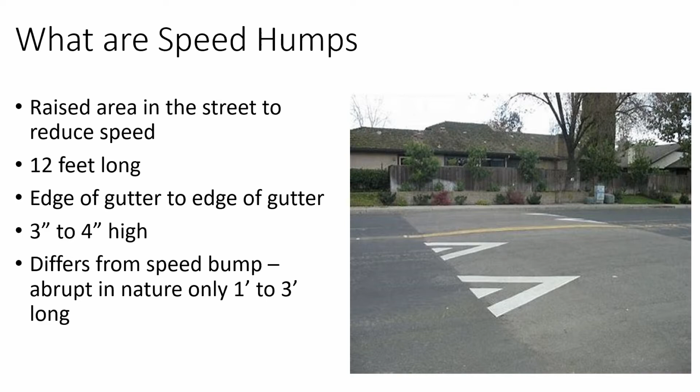Okay, what are speed humps? Basically it's a raised area in the street to reduce speed. They're typically 12 foot long, about 3 to 4 inches high, so they're not very highly raised. A speed bump, on the other hand, is found in parking lots. Those are very short, 1 to 3 foot wide, and 4 to sometimes 6 inches high. Those are private; you don't want to put a speed bump in a road because that's considered a hazard.

Where are speed humps recommended? Only in residential areas, placed on streets with a quarter-mile continuous length, a regulatory speed of 30 miles an hour or less, which all of our residential streets are. You don't want to put them where a driveway is located, close to an intersection, or near fire hydrants. You use your judgment of where you want to put them, but typically it's between driveways in a residential area.

Some things to consider, typical of speed hump policies across the country, the state, and even outside the United States, is a petition from 2/3 of the residents or households whose property abuts the street segment. In other words, one person wants it, goes up and down the street, and tries to get 2/3 of the people to sign a petition. If they agree, we look at next steps, such as whether it's city initiated versus citizen initiated. Another consideration is whether to require a minimum 85th percentile speed study, where speeds have to be over 35 miles an hour. Some cities have a speed limitation, some don't. That's something to consider.

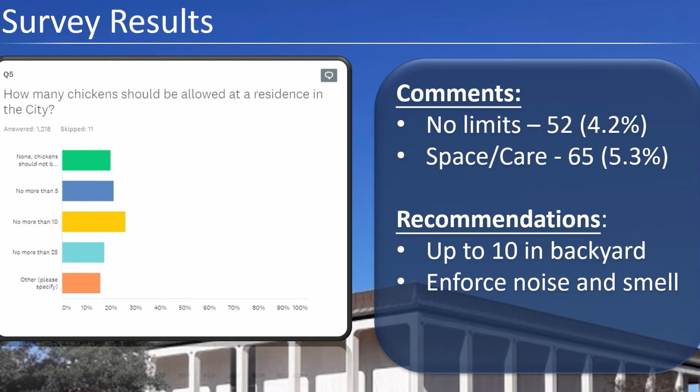Don't we have a limit right now? Not in the total number of chickens. No, I don't believe we do. I think we only have a cap on the number of chickens in an agricultural program, not if you're just raising them for the joy of chickens.

Let me ask a question about 'not visible from the street.' Yes, ma'am. Because I'm having a little bit of trouble worrying about putting chickens in the backyard. If you're on a corner lot, and you build a privacy fence that doesn't interfere with traffic sight and all that, then what difference does it make if they're on the side yard or the backyard?

That's a good point. As long as they're not visible, then your neighbors would probably be happier if they were on the side. I'm just having some problem with requiring backyards. That's a really good point, as well.

I want to circle back to a point you made earlier that I don't know everyone picked up on. In certain parts of our community, it's not normal to have a screened fence backyard, so if you say 'backyard,' you're not necessarily keeping the chickens out of sight from the street. So what I'm hearing is you'd prefer it say 'behind an enclosed screening fence' or similar language, without concern whether it's in the front yard, backyard, or side yard. That's a good point. I'm seeing nods around the table. I'll work on some language to bring back to you.

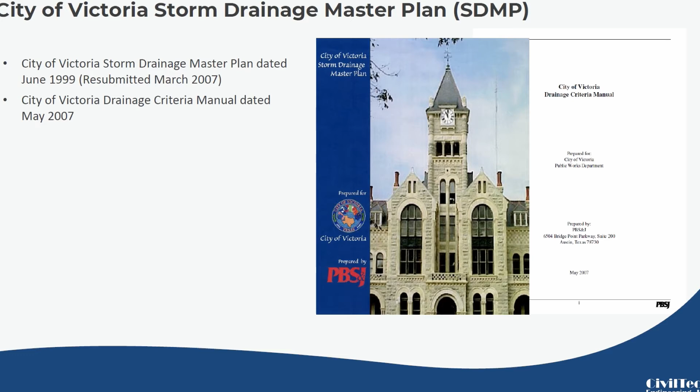But the actual whole engineering product and the cost associated with that plan is in 1999. So the document is on file. It's referred to by the Department of Public Works as what they implement projects.

So what are the elements of the plan? If you allow me, I'm going to go through this list here. First, in that dark blue highlighted area at the top, it was really to develop recommendations for what we call the ultimate development of the city. That's a complete full build out. So there was a series of projects identified to accommodate all that additional water from new development. It wasn't necessarily developed to solve existing problems, okay? But by implementing some of the projects, it would help to alleviate current problems. Within that plan, there are several elements.

As this comes back up, 2 items in it were called regional detention ponds. One along Lone Tree Creek, which is called the Lone Tree Facility, and that has been partially constructed. It's about 75% complete today. Much of that excavation of that basin has taken place through the Highway Department's excavation. And then there was another facility proposed along Spring Creek.

Northwest of Loop 463, also when you look into the plan, you're going to see several what we call open channel modifications, improvements along your major streams. The plan calls for widening, deepening in some cases, and several bridge and culvert replacements along creeks such as Whispering Creek, the North Outfall, US 77 Outfall, the West Outfall, Ben Jordan Outfall, South Outfall, Jim Branch Outfall.

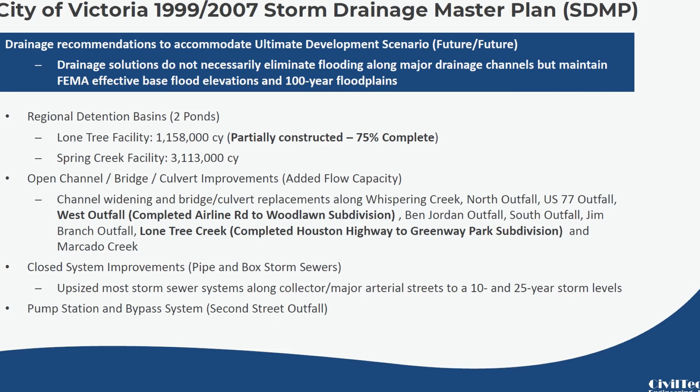Updating those costs today, which we did, there's still a cost of about $293 million to implement your storm drainage master plan.

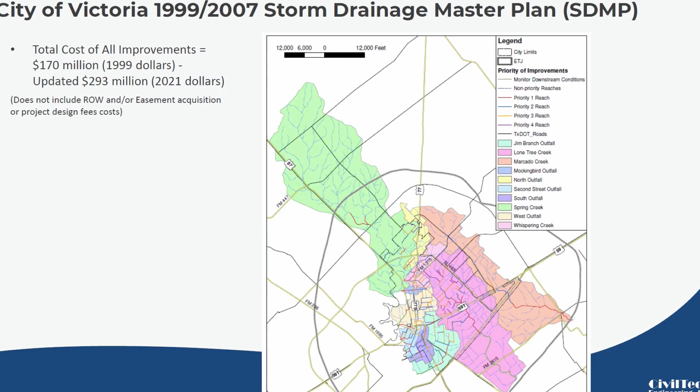There's a little note there that does not include right-of-way and easement acquisition cost. So that is your current storm drainage master plan.

What you're hearing too today is something called FEMA floodplain maps, and there has been a relook at the floodplains in the city of Victoria. I want to point out something about the current floodplain maps with you.

So the current regulatory maps that the city regulates off go back to 1987, 1998, and 1999. FEMA has been in the process of updating those maps and have reissued them as pending approval as of April 30th, 2020.

One thing you should know is the data, the scientific data within that update is still based upon the science that was developed in the 1990s. The only thing FEMA is doing, and this applies to several communities, is updating the topography for the area and remapping the same water levels, but on better topographic area information.

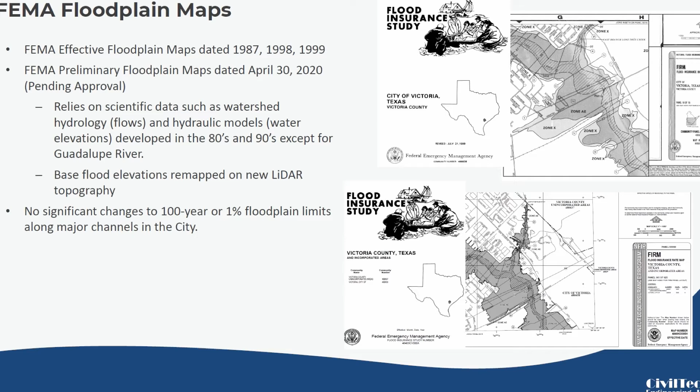It's called LIDAR today. So it does help communities at least have some better understanding, but still the science really goes back to the 90s in terms of hydrology and hydraulics. So when you look at the information, there's really not a whole lot of differences between your 100-year floodplains along your major channels.

So what I'd like to do is to take you through each of the tasks that we did for your project and give you a little bit of background on each of those tasks. But at this point, is there any questions before I get to each task element?

Yes, ma'am, I've got a question, and perhaps it's because I don't have the understanding that you do. But on this page before where it says no significant change to the 100-year or 1% floodplain limits along major channels, I take that as a good thing, and that the current drainage plan that we have in terms of development is working. Is that correct?

That I think it's, I remember no net gain from a long time ago. I think that's still in there, and I'm taking that to mean that we're on the right path. Yes, we need to build more capacity so that we can continue that no net gain, but am I making sense, or am I like, and if I'm way out, you can tell me so.

Well, definitely the city has made investments in drainage clearly over the years. Every time you build a roadway, you're making investments in drainage. There's been some implementation of your regional plan to accommodate new development, but very limited amount of that work has actually been done today. There does not appear to be significant floodplain water in people's homes in Victoria.

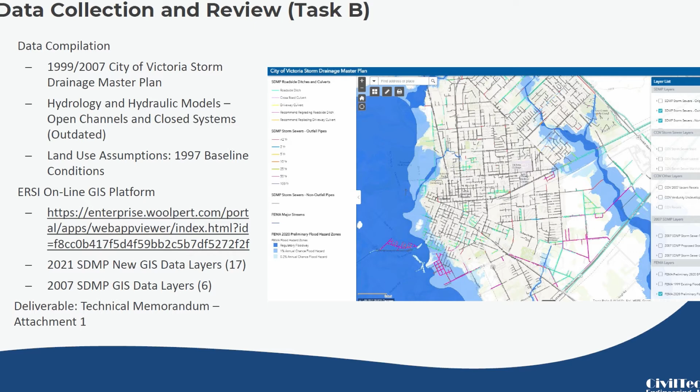In the PDF presentation, which Council probably has received a copy of, you can hit the hyperlink and go to the online GIS platform currently run under our website, CivilTech Engineering. That will eventually be transferred over to the city's GIS, and they'll have the ability to run those layers. If we had time, we could look at those as well. But we created 17 new GIS data layers, which add to some that go back to 2007 that are on there.

The first priority the city asked us to look at was undeveloped parcels and the potential for development of those parcels. There were a little over 245 undeveloped parcels in the city, representing about 4,000 acres. We were able to look at 45 of those, representing about 1,350 acres of undeveloped land in the city.

Shown on the right side is the location of all the parcels that we looked at, ranging from 2 acres up to several hundred acres.

As part of the engineering effort, the city asked us to look at what development constraints in terms of drainage would be on those parcels. So we developed 28 development constraint maps to aid the city's Public Works in understanding what the drainage issues would be, as well as developers, when they look at these developments, to better incorporate drainage in the future.

With those, we were also able to develop 5 regional drainage solutions where city participation would be needed to help development progress on these tracts. Those solutions included channel improvements, storm sewer improvements, and areas where easements are needed.

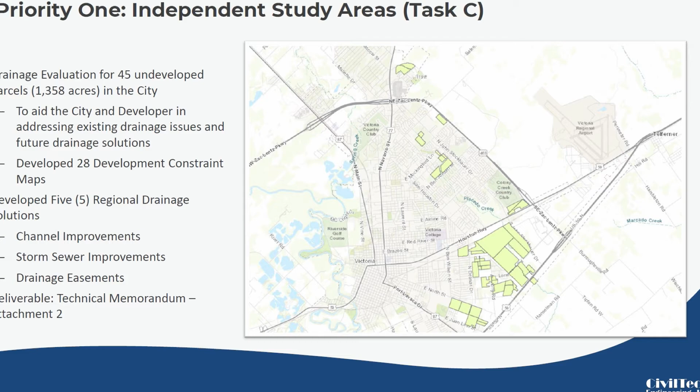Thank you, Melvin. Can y'all read that up there? I can't see anything, I'm going to have to use my notes.

As Melvin explained, we selected 45 undeveloped infill parcels within the city and performed a pre-development drainage analysis on each.

The green figures are the parcels that we looked at. We utilized all of the city's existing GIS data, combined with all of the new data generated by this study, to evaluate the development potential of each of these sites.

What we found was that 17 of the studied parcels had no access to an adequate drainage outfall necessary for proper development. We also found that 12 of the parcels had moderate to severe floodplain issues.

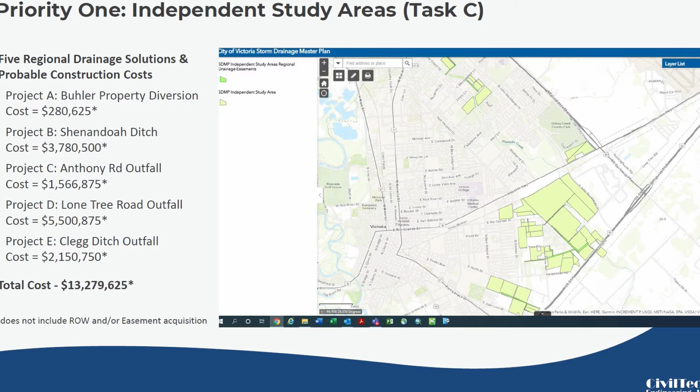We then searched for drainage solutions for each of the difficult tracts and came up with 5 regional projects that would improve the development potential of 23 of the infill parcels studied. These 5 projects would also improve drainage for other undeveloped and some developed tracts within the 5 general regions. I'm going to briefly go through each of the proposed 5 projects.

The first of the projects is just outside of Loop 463, between Salem Road and Mockingbird, on the Buhler property. It's a very old problem.

This problem was created in the 1980s when Loop 463 was first constructed. The master drainage plan at the time, the 1978 plan, had designated that this property, about 100 acres, would drain under Loop 463 into Lone Tree Creek. But when the loop was constructed, the highway department took advantage of an existing rice canal and drained this 100 acres under the loop at this location.

The problem is that Meadow Creek subdivision had been constructed 10 years prior, and since that time the water runs through the loop here and then through Meadow Creek subdivision. It ends up in Lone Tree Creek right about here at East High School, so it gets to the same place, but the system through this subdivision was not designed to take this acreage through it. So as this area develops, it's going to get nothing but worse.

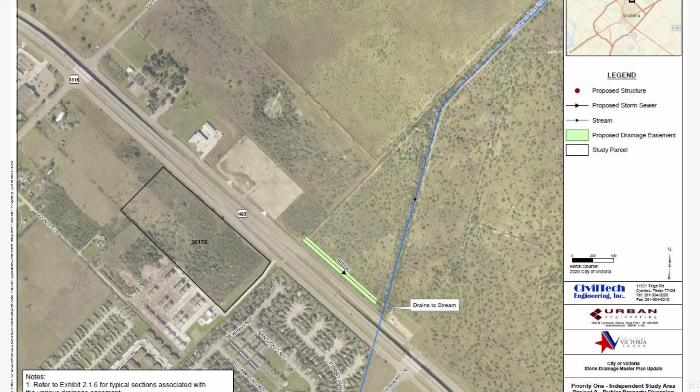Under normal circumstances, Shenandoah Ditch functions pretty adequately. I personally have never seen it cause a problem. However, this ditch is responsible for draining quite a bit of area from Guy Grant Road up to around Will Hurd. This is John Stockbauer—it drains this area too. It's got a fairly large area to handle, with quite a bit of undeveloped property. That property is undeveloped because they don't have an outfall—no ditch running up in there deep enough for them to use.

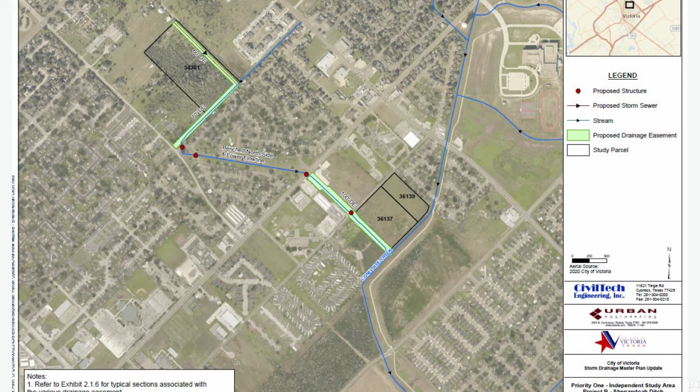But the overland flow analysis we did as part of this study, which Melvin will get to in a moment, indicates there's a larger lurking problem: the 100 acres north of the loop, plus everything from Loop 463 to Guy Grant Road, would rather come down that old Rice Canal spillway and go through this area. Once I looked more closely at what had been done here, I saw that if the storm sewer in this subdivision doesn't take the water, and the storm sewer in John Stockbauer doesn't pick it up, the downhill tendency is for it to end up at Shenandoah Ditch. So this is the route and the proposal in our plan to aid in that event, plus provide better drainage for this area, at a cost of about $3.8 million.

If you know Victoria, you know there's already a 72-inch storm sewer pipe there, and yes, we are proposing a second one. This piece of property is the one suffering from not having an adequate outfall to Lone Tree Creek. The estimate for this project is $1.57 million.

And would it just fix the place you're pointing to? Are the other two lots okay the way they are? It's the whole block, if we can call it that—not just the bold tracts. Also, the James Wayne property on the left would benefit from it.

The current underground 72-inch storm sewer drains this portion of the subdivision, and all of this property up to about here. It's just not large enough. I might as well say it—this landowner did not allow an open ditch to be put in at the time. Putting in an open ditch would still be the best way.

Feel free to interject with the work you're doing on the neighborhood piece too. I'm currently backed up—I keep hitting the wrong one. So that one was, this is a 72-inch pipe.

I'm more interested in this one. This portion of the solution is—I have a contract to solve these people's flooding problem, so I've been working in this area for a while. I also had a previous contract to work on development of that piece of property, and had to tell him we don't have a way to get there without the assistance of the city.

That's kind of the common theme—these people can't help themselves. This one because it's an existing subdivision, the other because they don't have the power of condemnation or the ability to go to other pieces of property and get easements. They're drainage locked. We know the existing system is overloaded and we need to find solutions. So these two solutions of spreading this drainage out, taking it into the creek here, is the best way for this property by itself to gain access for drainage.

This solution is the best for this area. There's a hill right in here that you're not seeing—well, you can't see it, but there's a ridge in here. This portion of the property goes this way, this portion goes back this way. So there's a natural divide in there, and also it breaks it into bite-sized pieces. But yeah, I'm working on this, and that is a very possible solution for this drainage up here.

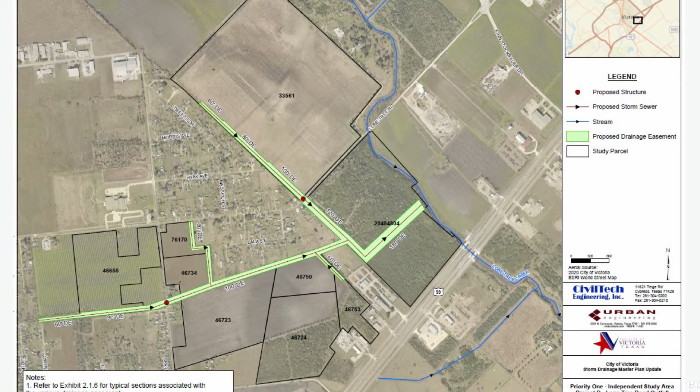This was mentioned in the '78 plan. It was a little bit different in their routing—they came straight through the middle—but this is basically what the '78 plan suggested. Was that helpful? Yes, okay. Yes.

We're coming up on 3 o'clock. We still have at least the parks plan coming up as well. Want to make sure we have adequate time to get through both, or let's just get through one. But I think we can get through this in the next 20 minutes? 30? Maybe 30 minutes, but maybe. I'll make it fast—last project. And then we can just take it from there.

Community center, old Stroman campus. There's no drainage coming out this way. These tracts, almost up here on the highway—these tracts were brought to my attention because they're for sale. And I said, they've got to drain this away. It's downhill, and downhill a lot. And we have no easements to get here. This person can't do it by themselves. And that's a common thread that we have on a lot of these projects.

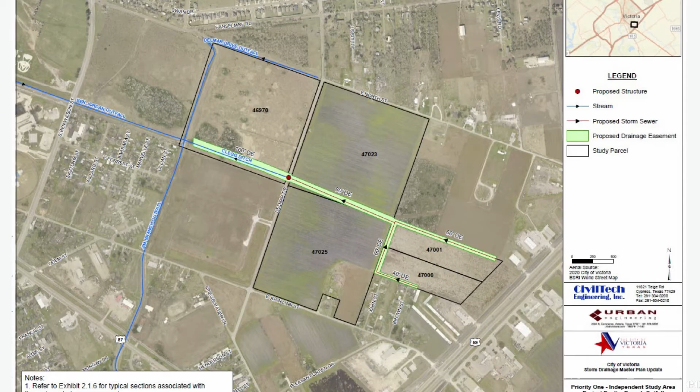Back to Melvin. All right, Melvin, you heard the man—got to run through it quick. Absolutely, thank you, Ray. You took all my time, but...

It's clearly very important. So as we progress through the study, this next part is really looking at the city's current drainage criteria manual and what updates would be necessary based on new information. What's happened different today is that the NOAA, the National Oceanic and Atmospheric Administration, part of the National Weather Service, adopted new rainfall data—the big drops of rainfall. The last rainfall data we had goes back to the 70s, which is what us engineers worked off.

In this table, on the left-hand side you'll see a storm event: 2-year, 5-year, 10-year, 25, 50, 100, and 500. On the right-hand side, you'll see what that current means—that's what your community currently uses. And then what's being proposed today is something called Atlas 14, the new NOAA information. Most communities across Texas have adopted this new rainfall for the design of storm sewers and open ditches.

When you look at this new data, what you're seeing is that if you look at what's highlighted here, NOAA, our government, says for the city of Victoria a 100-year storm is not 11.5 inches in 24 hours.

It's actually 13.4 inches in 24 hours, about a 1.9 inch difference. Other communities across the coast have also seen higher rainfall for their community. But what's interesting is that everything underground, your storm sewers, are designed really for this 5-year and 10-year event, and that's also very common. The rainfall really hasn't changed that much. There's very little difference in that rainfall.

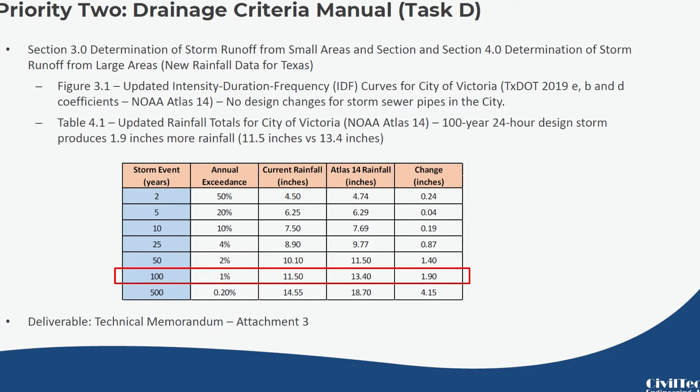But what we are asking, because of this 100-year rainfall being different, and the detention, is that the city should adopt a permanent detention requirement. Right now, all developers really do put detention in, but it's because your criteria says temporary. If you haven't built your channels yet, then you would only need to provide temporary detention. And the reality is that most communities are really going to require permanent detention.

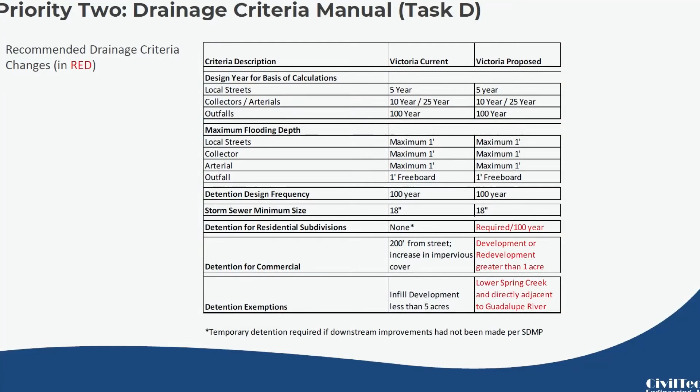So we have provided information for the city that says, remove the temporary detention, have permanent detention for the development community - clear guidance for the developer engineer. This really doesn't change what's going on today from all practicality, but there would be some exemptions that'd be looked at. Those exemptions are listed here.

Redevelopment, which are remodels or additions, would only require detention for any increase in impervious cover. Second, development that's 1 acre or less with less than 65% impervious cover would be exempt. Anything above 65% impervious would be detained for on 1 acre or less.

A lot of communities are going to green infrastructure. They're recognizing the importance of what we call low density development. So there would be an exemption for any parcel that has less than 20% impervious cover to be exempt. And then clearly any properties that drain to the Guadalupe River or to the lower reaches of Spring Creek would also be exempt from detention.

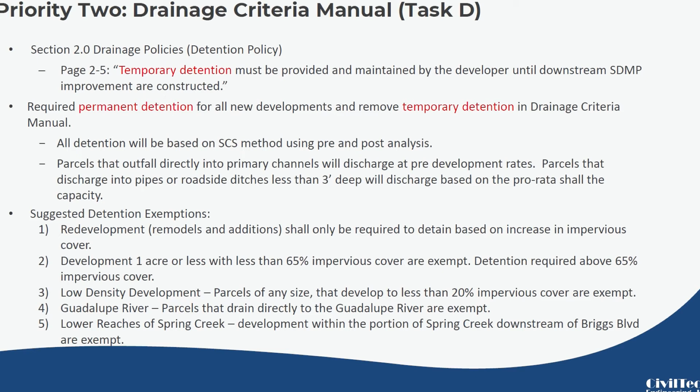We would also recommend - we ran several calculations - that to keep the playing field equal, the city Public Works needs a storage rate, what we call it, so the developers understand that this rate is the minimum amount of detention storage you would need based on the percent impervious cover. That way when information's coming into the city for review, they're able to check it against this particular curve to see the engineer or developer met the minimum requirements on detention.

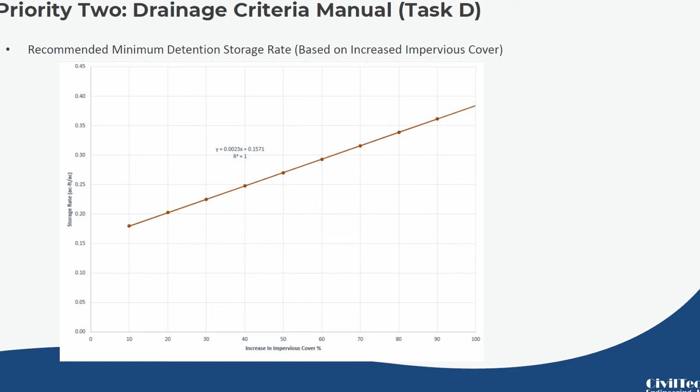I have a quick question on impervious cover and talking about low density. I'm picturing a solar panel farm field. Is that impervious cover or not? I'm just going to throw that out there - that may be something to think about, because I'm seeing water pouring off.

So you don't have to answer that now, it's just a thought. Specifically what you're referring to - typically that's ground cover, so concrete is impervious, gravel - there's a definition. There's definitely grass underneath, but then you've got wall-to-wall solar panels. Right, that's certainly something that has to probably be looked at.

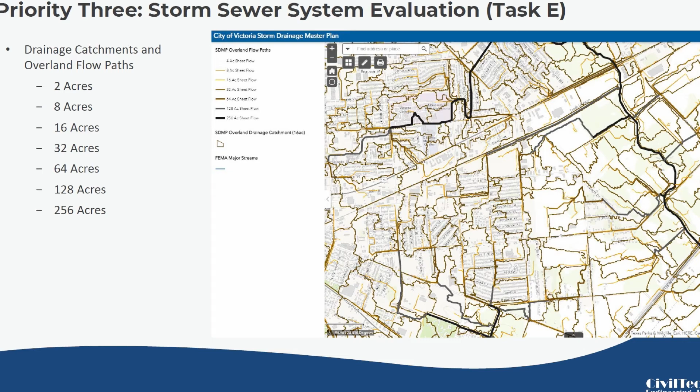Okay, so we'll go to our priority 3, which is a storm sewer evaluation. We did do quite a bit of technical work re-looking at the surface drainage across the city. There is a two-dimensional model that we ran to take the rainfall we talked about in the previous slide, drop it on the city, and determine how that would affect the flood risk. As Mr. Garza had pointed out to you, the FEMA maps give you a flood risk related to your major channels, your big floodplains, but the real flood threat exists throughout the city in terms of when your underground systems are surcharged - overloaded with the higher rainfall - then your surface must take that water and convey it to your outfall channels.

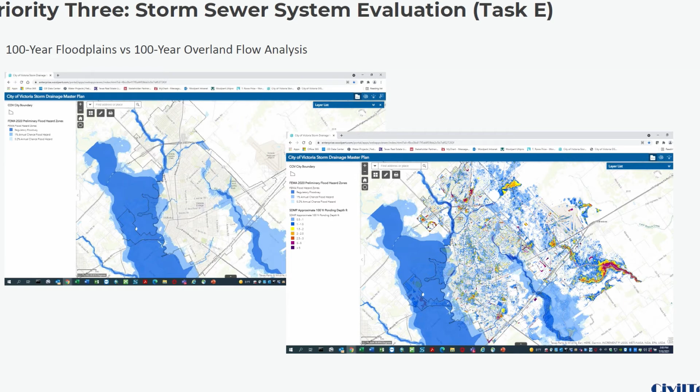The real flood risk is when you run a two-dimensional model with 13 inches of rainfall. You will see that the potential flood risk is much higher when you really look at a complete model analysis, which we have. This is very helpful for developers and engineers to look at how to better

drain subdivisions to key locations that may have had ponding problems. Priority 3 was really to take a look at your storm sewers and classify them. Many of the city storm sewers that were built years ago have a certain level of service that we looked at. Much of the city has less than a 2-year capacity for their storm sewers to drain water. The current design requirement is that city systems have at least a 5-year. So all your new subdivisions do have 5-year level of service, but a lot, again, not unusual, rainfall was a lot different when those things were designed back in the 30s or 40s. But as these systems get replaced, they'll be upgraded to higher standards.

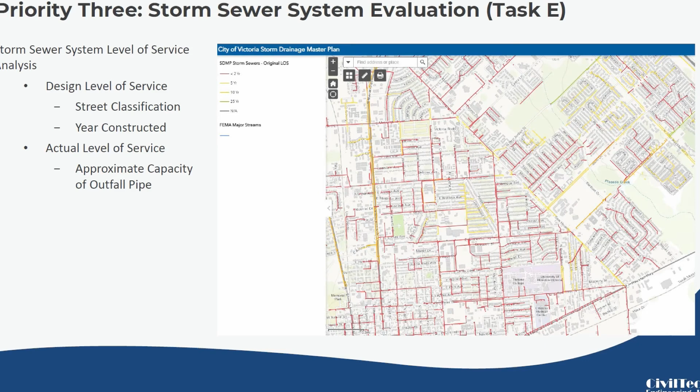Mr. Garza mentioned to us that we're going to be looking at maintenance items. It's been a long time, or maybe never, that the city has actually televised storm sewers and cleaned them. Unlike where you clean and televise your wastewater, your sanitary sewers, the storm sewers have not been televised or cleaned. You've got about 166 miles that we had at least looked at for possibly televising and cleaning. If you were to do that whole program today, you're looking at a cost of about $16.6 million to televise and clean sewers.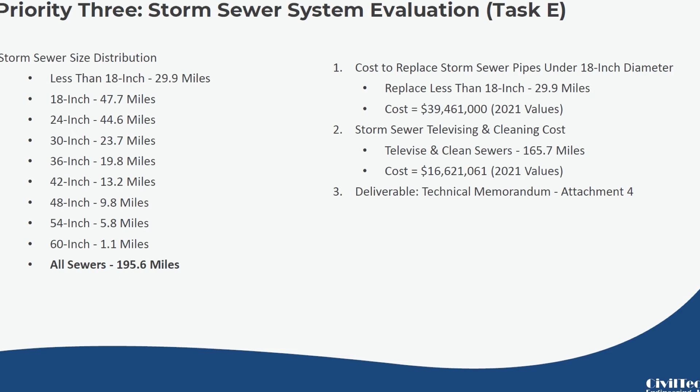One of the first items you have in your database today is all the roadside ditches within the city. Clearly, not only do you have storm sewers that drain water, but you have a lot of roadside ditches within the city. These ditches—you have about 114 miles of ditches. If you were to have a program to regrade, meaning dig out these ditches, you're looking at about a $15 million cost. You have about 16 miles of driveways, or over 3,000 driveway culverts associated with that. If over time you were looking to replace those driveways, you would be talking about $43 million of cost.

With that, we took a look physically, went out and drove the city, and we identified really what needed to be done today, and we're calling those priorities. So we found 23 miles of roadside ditches today that could be cleaned in terms of regraded at a cost of about $3 million. That includes 669 culverts that should be replaced, and that would cost somewhere around $8.7 million, for a total cost of $11.6 million.

Can you go back real quick? Yes. So those are the areas there that, I guess on the screen, they look what—pink? Those are the areas that are priority areas. So you can tell that the majority of them are south of Business 59, so they're just in the older parts of town.

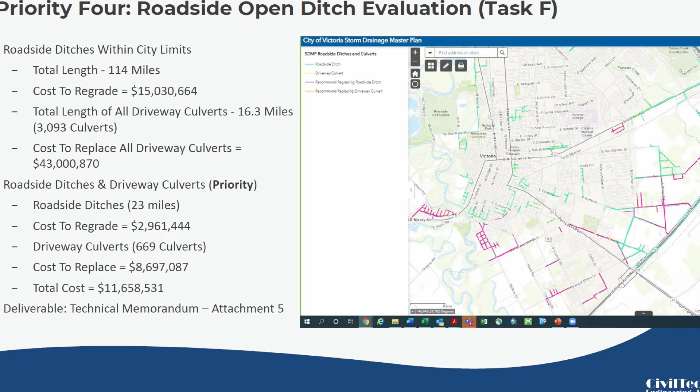Also, your major outfalls should be maintained regularly. We did take a drone survey of all major outfalls and all your major creeks we looked at. There's about 74 miles of open ditches and major channels. Of those 74 miles, about 19 miles is concrete lined.

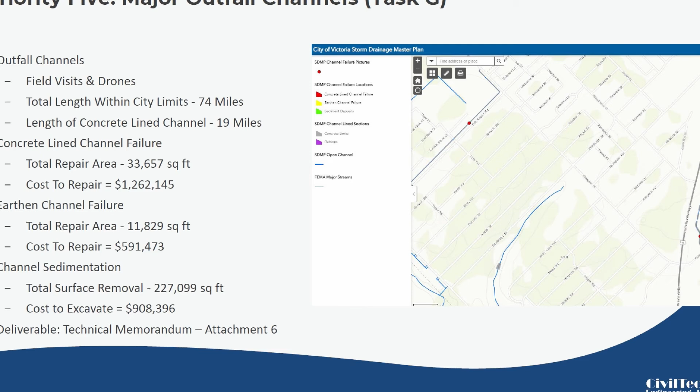When you look at it, we identified not a whole lot of concrete failure today, so that's a really good thing. But there are a few significant areas, about 33,000 square feet, representing costs of about $1.3 million to repair. There are several channels with erosion that could be repaired at a cost of $591,000. And then there are channels where sediments have built up due to erosion, which would cost about $908,000.

So in summary, this update was to provide you several recommendations through these priorities. As Ray went through priority one with you, if you were to upgrade or build the 5 regional drainage solutions, you would be looking at a cost of about $13.3 million, which would exclude right-of-way and easement acquisition costs.

If you're looking at storm sewer evaluations, going to replace all under-18-inch diameter pipe and do all the televising, you'd be at a cost of $56 million. Priority 4 is your roadside open ditches, to regrade those and replace driveway culverts, talking about a cost of about $11.7 million. And then your major outfalls, doing those repairs.

Again, those will just be what we know today, and certainly in the future there will be added costs to those as well. So $2.7... I mean, when you start adding up infrastructure, it's extremely expensive. So you had a $293 million storm drainage master plan of projects. This would be an additional $83.8 million of needs for drainage.

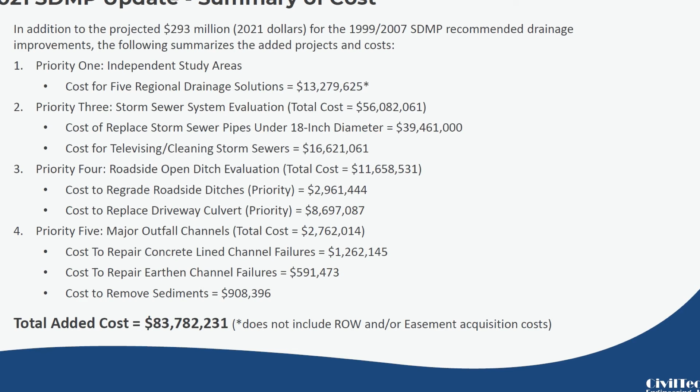Clearly, not all of that is a priority maybe for day one, but here are some recommendations we have for you.

Recommendation number 1: as I mentioned at the beginning of the presentation, everything in your current master drainage plan is over 20 years dated. So there is some time and attention that we believe should be spent on Jim Branch and Mercado Creek because of some potential development pressures in those watersheds. We would ask that you further conduct restudies to better define more regional drainage solutions. The cost of planning those types is around $400,000 per watershed. There are grant funds potentially from the Texas Water Development Board that could be looked at to solicit funds for that.

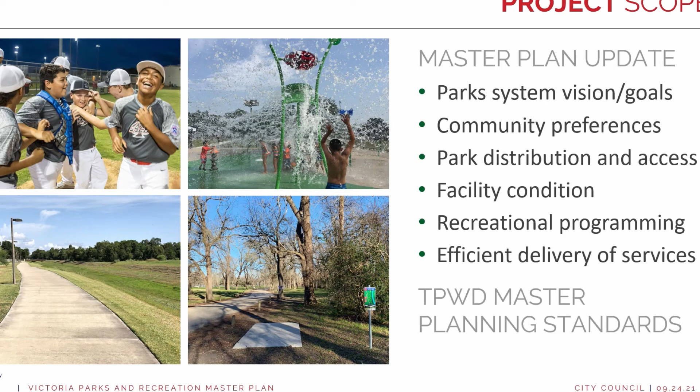The plan itself is prepared to adhere to the recommended guidelines of the Texas Parks and Wildlife Department, so that once adopted, it can be utilized to help with applications for grant funds from the State Parks Department. As you've seen before, the planning process is a four-phased process.

We started off with visioning exercises, talking to the public, doing a general assessment of your park system and recreation assets today, and developing what we call the blueprint — essentially the recommendations based on what we found throughout the planning process. Ultimately, we're entering this last phase, what we call commitment, which really means taking those recommendations and working with city staff to build an implementation program with recommendations on how you would implement the plan over a 10-year time frame.

We have included both targeted stakeholder outreach and public outreach as part of the master planning process. We not only had city council interviews and met with specific focus groups, but we've also conducted online surveys, had public open houses, and held a stakeholder design workshop when we initially started work on the three conceptual plans, providing materials for city staff to hold more public information booths.

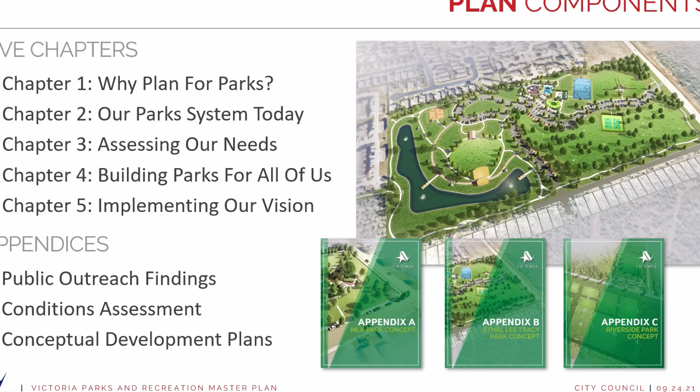Finally, each of the three conceptual development plans being prepared are intended to be standalone documents — the recommendations or ideas contained within those aren't necessarily included within the master plan itself, but information that would accompany it. The master plan itself would be very general about investing in those three parks specifically, in accordance with a number of the recommendations prepared as part of the conceptual development planning process.

When it comes to the goals included in the Parks and Recreation Master Plan, right now there are four proposed goals, whereas your 2012 Master Plan had nine goals in it. Some of those goals really weren't goals at all — they were more measurable objectives or even actions. You actually had a whole goal on improving restrooms.

Well, once again, that's not necessarily at the level that we're working on and preparing a system-wide master plan. Those types of goals are actually best left to more specific and measurable actions.

The first goal is about park system growth and access to your park system. The second includes objectives and actions relating to investing in or making improvements into your existing park assets and recreational facilities. The third goal talks about your community programs and events. And the fourth goal, recreational service delivery—this is just really an industry way of saying administer and operate your park system in an efficient manner.

But when it comes to park system growth and accessibility, the intent is that ultimately the community is providing equitable access to your properties and your recreational amenities. And the objectives and the actions or strategies in your plan that relate to this goal include actions related to park acquisition, how you distribute your parks or new recreational facilities, and how you connect those facilities via trails network or other improvements to the sidewalk network.

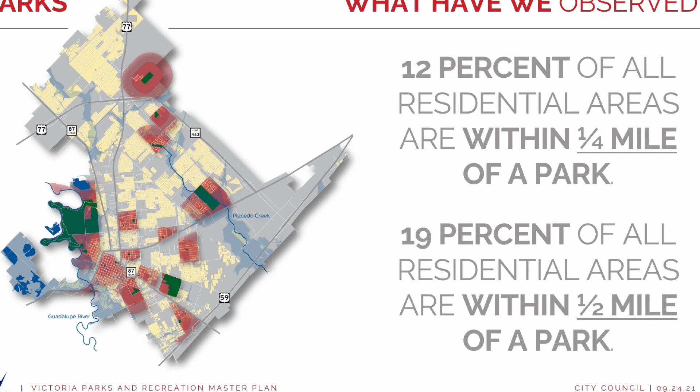But as we all know, the vast majority of that acreage is located in one park, Riverside Park. Because of that, and because so few of your residential areas are actually within a 5-minute or 10-minute walk of a public park, this plan also recommends a proximity target, saying that in addition to acreage, you should be striving to distribute parkland throughout your residential areas so people can reside within a quarter or half-mile walking distance of a park.

So the recommendations of this plan as currently written are: when it comes to parkland acreage, maintain that current 2012 standard. You've already met that standard for regional and community parks. As a community, you may have a little bit of work to do in reaching the recommended standard for neighborhood parkland. We also recommend establishing that half-mile walkshed target for neighborhoods.

All of these areas in blue are areas that are not within a half-mile walkshed target of a public park. Once again, target levels of service are advisory and aspirational - we're not saying that in 10 years' time all of these areas have to have a park within that walkshed target. The Parks Master Plan is merely suggesting you move toward reducing some of these service area gaps when it comes to ready, walkable access to your parklands.

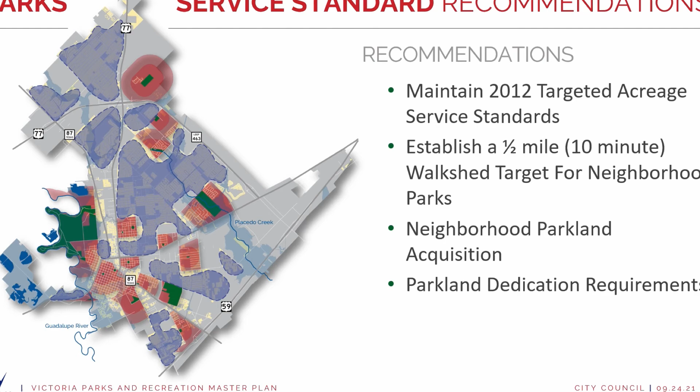That can be done in one of two ways. One way is that the city itself can say, within our budget, we are going to earmark some funds so we can go out and retroactively purchase a piece of property within one of these service area deficits and develop a park.

But the other way that most communities we work with are doing this is by incorporating parkland dedication requirements within their land development code, to ensure that as they continue to grow, their service area gap will not increase, and they can also close that service area gap when you have new subdivisions built within some of the otherwise built-out areas of your community.

Likewise, with parkland acreage, there's only a very small percentage of your residential areas that are within close proximity to a trail. We know, and the survey here in Victoria showed it, that in every community we go to, trails almost always rank at or near the top of what people want.

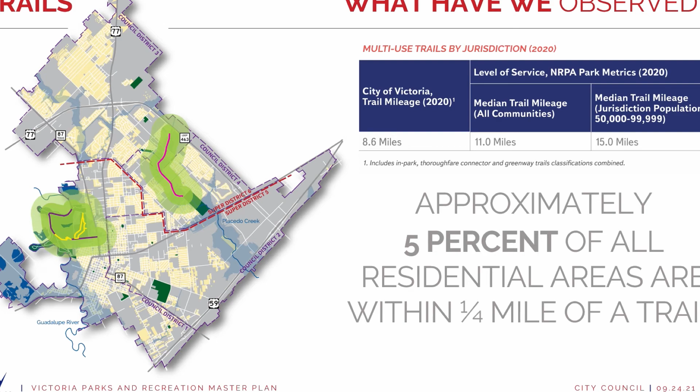When it comes to reducing that parkland service area gap, trails are actually a perfect way to do that. Building more trail corridors reduces the gaps because you are creating walkable pathways from neighborhoods to your existing parkland assets. This plan recommends an additional planned multi-use trail and greenway network of over 50 miles of trail.

Now, much of the recommendations are simply taking the Paseo de Victoria biking and hiking plan that you have on the books and incorporating that into the Parks and Recreation Master Plan, but this also includes some additional recommended trail mileage as well. Now, some of the corridors, when it comes to how in the heck can we build all that sort of trail mileage?

Well, in some cases, there are going to have to be some specific investments in new segments of trail, particularly where you're talking about trail on corridors that are non-roadway corridors, like a lot of the drainage corridors that the prior group was speaking about. But when it comes to trail along roadway, and this map actually includes potential trail along roadway, oftentimes those trail improvements can be incorporated into an overall roadway reconfiguration and rehabilitation project.

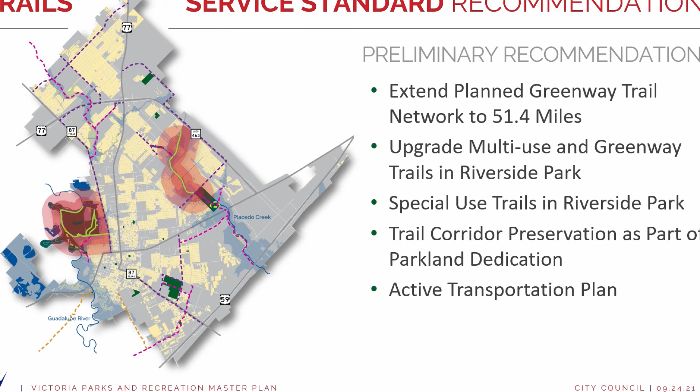Likewise, the plan establishes, and we showed you this graphic in May, the plan establishes recommendations for recreational facilities and recreational facility targets in the city of Victoria.

The plan includes a table of very common recreational facilities that you're going to find in most municipal park systems. And what we found in the work we've done in Victoria is that Victoria actually does a pretty good job of meeting targets that are consistent throughout different national organizations and other metrics. By and large, the level of service that you're providing in most of the recreational facilities in Victoria today are levels of service that should continue into the future.

Based on public feedback that we received through the planning process on specialized facilities, we have added a few things here. We are recommending some additional pavilions. We are recommending additional picnic facilities and playgrounds, and we are recommending also dog parks, because when it comes to comments received through survey efforts, dog parks was the most common comment that we received throughout the surveying process in the plan.

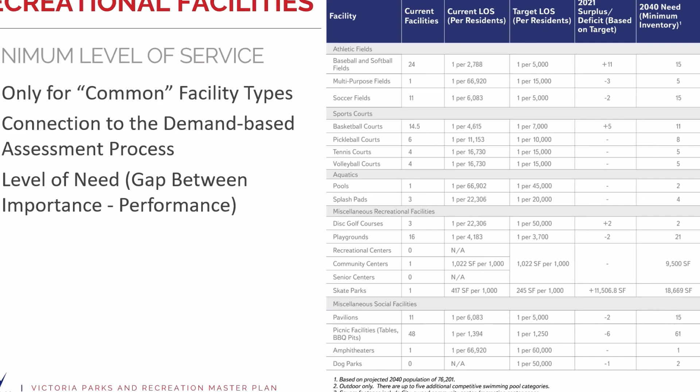Now, at this point, there are 61 recommended actions in your Parks and Recreation Master Plan. Do not worry, I know we don't have time to go through all of those. We will not. We wanted to highlight just a handful of those recommendations.

One of the recommendations under Goal 1 for your park system growth and accessibility that I haven't already touched on, because we were focusing really on level of service in the prior slides, is the issue of civic parks or parks in your downtown area. Of course, we're well aware that you are concurrently working on a downtown master plan.

And we've spoken with the consultants of that planning process. We're very well aware of the recommendations that they've made in the plan. And we're certainly going to make sure that when it comes to civic parks and the development of new civic space, that the final plan we're developing is worded in such a way to where it is deferring to the specific recommendations of the downtown master plan.

When it comes to growth and accessibility, as we said before, we also recommend the development of parkland dedication standards to be included in the City of Victoria's Land Development Code.

I will tell you that when it comes to parkland dedication standards, and if there are any concerns about Victoria's competitiveness, I will say that these types of standards are being incorporated into land development ordinances all over Texas and are going to be found in just about every major city that you compete with in Texas for investment and for economic growth. The intent is to include provisions that, in conjunction with developments of certain size, would require either the development of new parkland or the allocation of fees to the city in lieu of that parkland development.

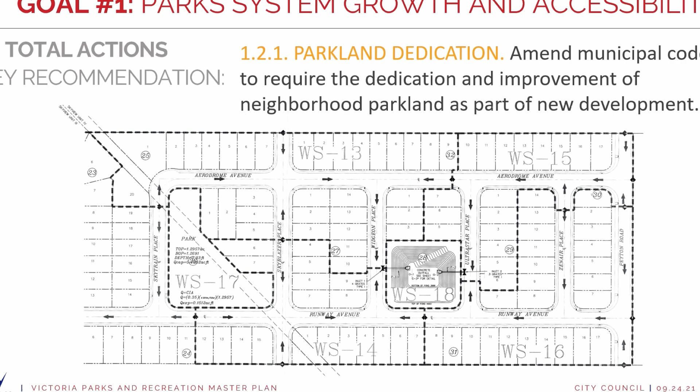Yes ma'am, in your picture there you've got a neighborhood park. What's a minimum size for a neighborhood park? There is no minimum, but general guidelines, realistically we'd say 1 to 3 acres, sometimes up to 5 acres. But the acreage, and whether you classify it as a neighborhood park or something else, depends on the types of facilities you put in it. There's also pocket parks. What's the size of a pocket park? We would generally say less than 1 acre.

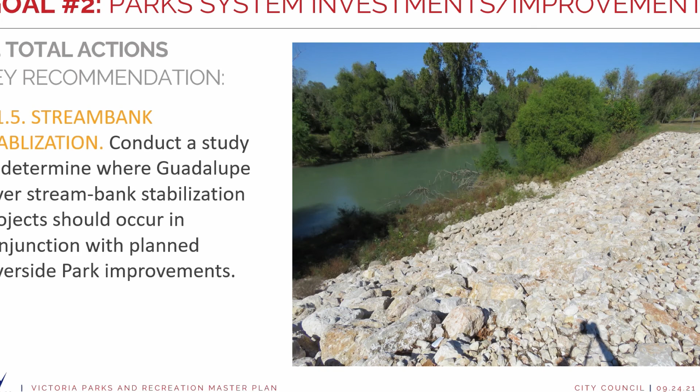Now, the recommendation in the plan talks about streambank stabilization, and specifically this relates to potential improvements to Riverside Park. We heard a lot about wanting more views of the river from the park, and pavilions up against the stream bank. If those things are going to be constructed, if there's going to be selected clearance within some stretches of the river, we know how volatile that river channel is, and there has to be significant consideration given to targeted streambank stabilization in those areas if you're going to invest in streamside facilities within the park.

When it comes to park system investments, as we said before, we completed a conditions assessment for all of the parks in your system, and that assessment includes for each park a series of recommended improvements to improve the maintenance level. I think collectively it all amounts to roughly $3.5 to $4 million. I was going to be shy telling you that, but then I saw how much all the drainage work is going to cost the City of Victoria, so that may be a drop in the bucket by comparison. But ultimately, the plan does include very specific recommendations for each park on minimum improvements to existing facilities that should be made today or in the near future.

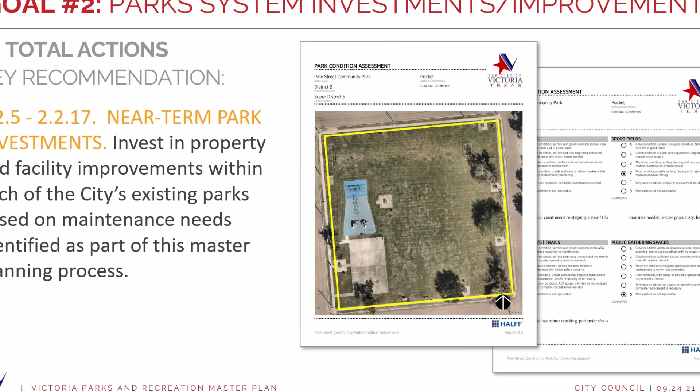Regarding new investments, in addition to the conceptual development plans that have been prepared, this plan actually even recommends the expansion of Lone Tree Creek Park. And by expansion, we mean the city actually owns additional land on the other side of Placido Creek, between the creek and U.S. Business 59. What we're suggesting is that as part of your trail network, the trail bridge the creek, proceed to US 59 Business and beyond, but on that side of the creek may potentially be a good location for a dog park.

The reason we think that would be a good location for a dog park in relation to Lone Tree Creek Park is that by physically separating it, putting it on the other side of the drainage channel of the creek, you're separating it from the other active facilities already in the developed portion of the park. You're keeping that type of use away from residential areas because there's always a conflict between dog parks and existing neighborhoods. Also, that side of the creek has enough acreage that you have the potential to develop an off-leash park. Off-leash parks end up being destination-type facilities for people who want to come into the community. Having a potential access point off of US Business 59 allows people who might want to access a new dog park to do so without necessarily having to come through the neighborhood portion of Lone Tree Creek Park.

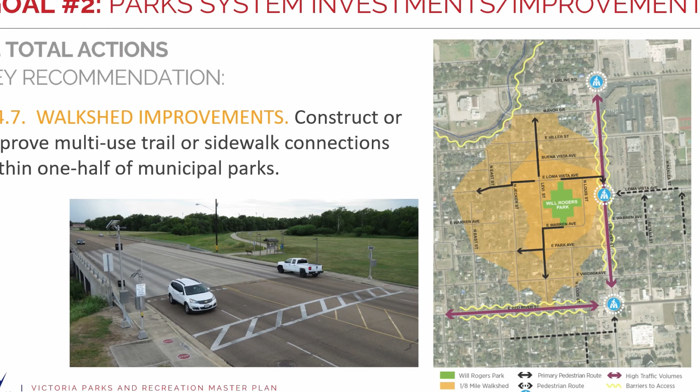We've got actions in the plan about walkshed improvements, basically investing in improvements to sidewalks, crosswalks, and facilities of that nature within an eighth of a mile of each one of your existing parks. There are also recommendations in the plan about evaluating the recreational programs that you and third-party vendors offer, in terms of program life cycle and program age segment analysis. When it comes to program life cycle, what we're looking at is whether program participation is growing.

Is it declining? Why is it doing so? Oftentimes we find declining participation means your community doesn't really want it anymore. These are the types of analyses that you have to do as a community on an ongoing basis to make sure that you're offering the right types of programs.

One other item that I wanted to highlight when it comes to effective service delivery for recreational services, I believe there's a way to mitigate maintenance costs. Not all maintenance costs must necessarily be borne by your Parks and Recreation Department.

I believe there's an ad hoc group. What's that group, Jason? The Parks Coalition in Victoria. If it was converted into a Friends of Victoria Park type of organization, basic maintenance projects, volunteer projects are certainly valuable projects that an organization like that could participate in.

Hey Christian, real quick. Yeah. We're running short on time, so can we go through these fairly quickly? Yes, sir. Okay.

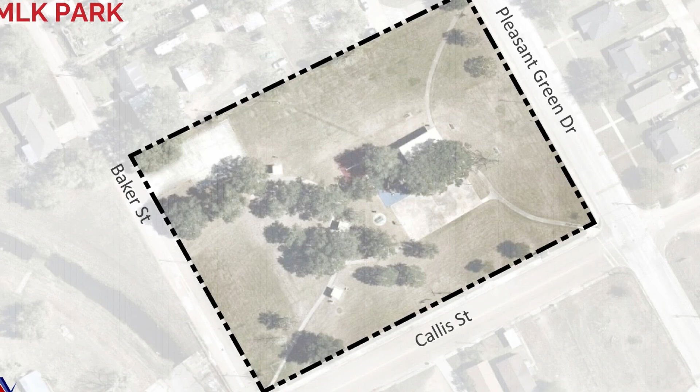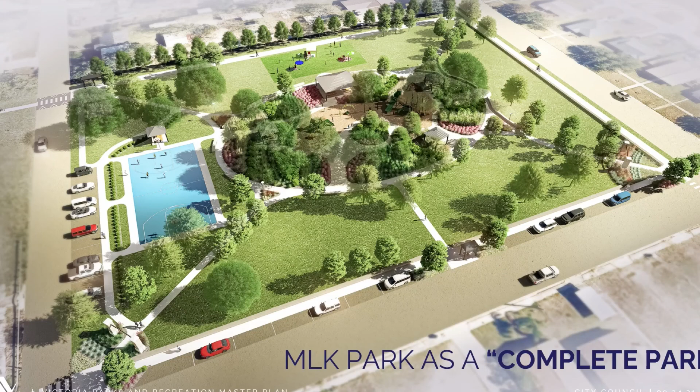In the interest of time, I'll go ahead and skip over some of the existing conditions analysis and even some of the feedback we had gotten from the last workshop we held with you.

So we'll talk about all three parks as quickly as I can in terms of what we call complete parks. What we mean by complete parks are parks that are designed and activated in a way that they are as popular as they possibly can be. They get the most amount of use that they can get, and they also have assets in them that build community wealth. Parks that are not well designed, parks that are not well maintained, actually do nothing to improve property value. But there is something called the proximate principle when it comes to parks, and we know through lots of data that parks that are well designed, parks that have facilities and activities for everybody, actually build community wealth, and you see the direct impact by increased property values for properties that are directly adjacent to or close to these parks.

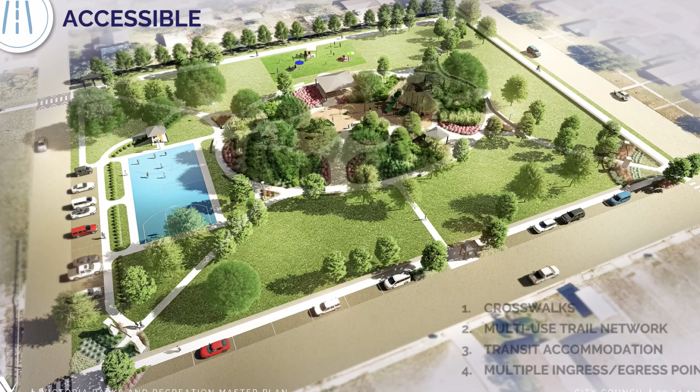We say complete parks should be accessible. The revised or updated MLK Park concept—please, I want to make sure you understand, we definitely heard what you said last time. We hope these concepts convey the messages you were trying to give us. So my having skipped over those other slides, I don't want you to think I'm just trying to gloss over the fact that you gave us a lot of valuable input last time.

But complete parks should be accessible. In this case, there are a number of marked crosswalks that are proposed to provide clear, defined access into and out of MLK Park. The refined or updated park is proposed to be part of a multi-use trail network that would extend further to the north and further to the south.

There would be, under this design, improvements to transit accommodation, making sure there was a clear transit stop, a shaded, comfortable transit stop, protected by on-street parking in this case, and certainly trying to create multiple defined points of ingress and egress.

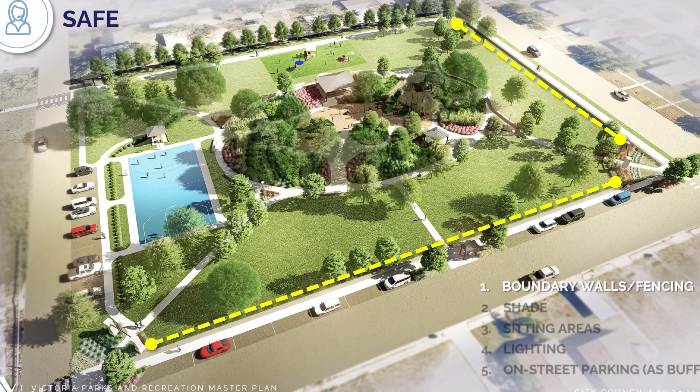A complete park is also safe, and in addition to safe and comfortable. It's difficult to see in the graphic, but the proposed park revitalization does include border walls or fencing along Callis and Pleasant Green to try to keep the activities in, to help parents when it comes to that wayward child that just goes running off.

As you can see, it's intended that the park design, even if some existing trees would have to be removed, that they are replaced and that there is a significant amount of tree canopy and shade. Difficult, once again, to see on this specific view, but on the plan view, there are a number of sitting areas in very close proximity to the active center of the park.

One thing, along this edge of the ellipse, the plan actually recommends a seat wall around the ellipse, multiple places to sit and multiple vantage points. There is targeted lighting in different parts of the overall master plan that is included in the cost estimates. And then there is enhanced or improved on-street parking that can help serve as a buffer between the park space itself and cars in the traveled way.

These complete parks are social, and what we mean by social is that they can be enjoyed by all people. If you've seen the plan view, there are a diverse set of amenities, whether it's active play areas or passive spaces, the basketball court, the playscapes. The ellipse itself includes fitness stations. There are just informal play areas in the park itself as well.

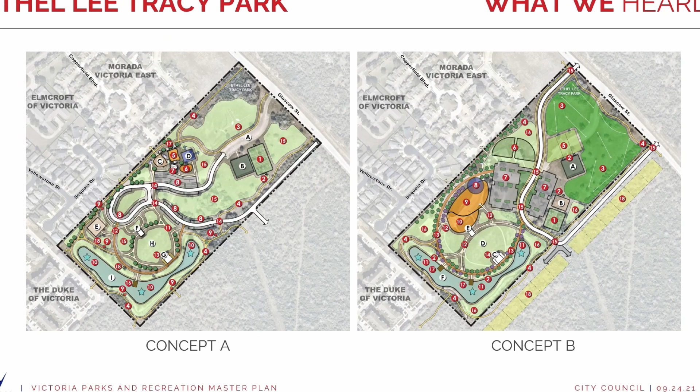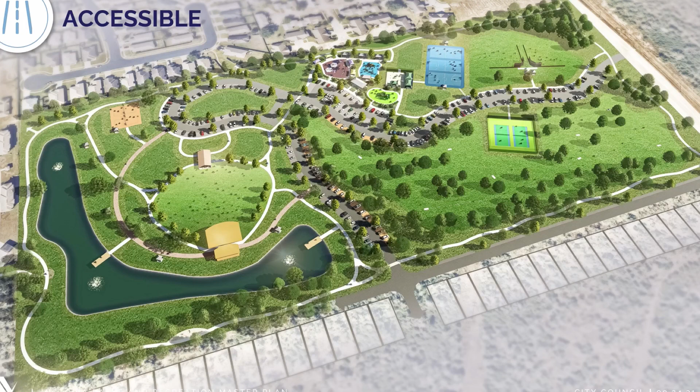No, I think we only have time to run through the neighborhood parks, especially now that you've explained what a complete park is. Let's just run through them real quick because we're already past the time. It's not your fault, so don't take it personal. I won't. We'll be done here in a few minutes. So I'll just run through it, and hopefully you'll get to see it in time.

Pedestrian connections in Ethel Lee Tracy Park. A new trail connection to the mall property off to the left of the slide. An access loop for vehicular traffic. This was something that was a big deal, having that secondary access.

Additional parking, both within the park itself and then perhaps on the access loop addition, which could also be a public street. I will say real quick that the amount of parking we're adding is based on an estimated number of total people that could actually fit into the amphitheater at any given time. We're going from, I believe, 214 to 402 parking spaces, and that doesn't even include the on-street.

Regarding safety, the plan proposes to push the access drive slightly away from the playground area. But to the point you all made last time, other than that, within the park itself, a lot of that access drive retains the same alignment, because one of you made the point of why do we want to spend money on moving a road when we want to spend money on the recreation. So we've kept most of the existing road alignment.

New neighborhood eyes on the park. We actually showed this concept to the adjacent property owner who seemed amenable to it. The idea would be that second access could perhaps be a public street, and that ultimately the development could be developed so that the houses are now facing the park—eyes on the park rather than backs to the park.

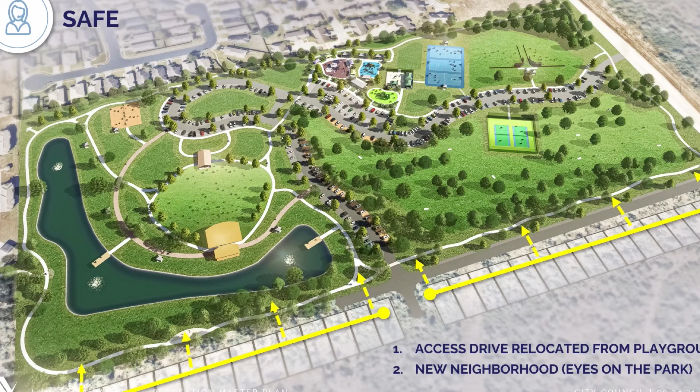Once again, we have grouped amenities, additional pavilions and seating, a proposed loop trail to gain access to the entire park, an amphitheater addition to the actual building, and an access or service drive around it that can serve as an additional promenade, restrooms, new restrooms over by the playscape area, and proposed enhancements to the pond.

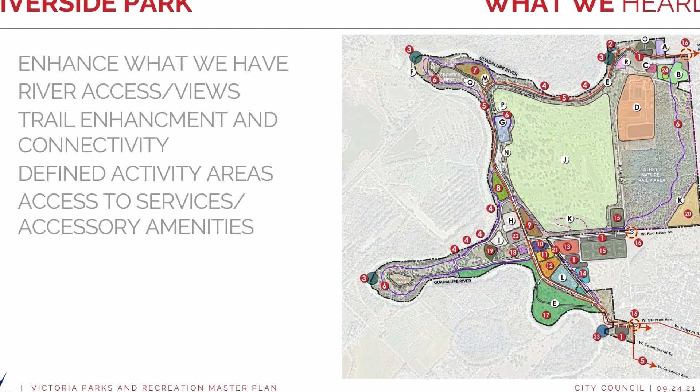We'll quickly hit on Riverside Park for a couple minutes. One thing we heard last time is that Riverside Park is our cornerstone park, very important, but don't try to get too fancy. We know that's what planners and landscape architects want to do, but just make what we have better. We hope we've come back with a concept that much more closely adheres to that guidance.

When it comes to accessibility, there are proposed multi-use trail connections, not just within the park itself but emanating from the park to downtown and adjacent areas, consistent with the recommendations of the Downtown Master Plan. There's also potential for a park addition on the northern end and a northern access road that may divert traffic from coming directly through a residential street.

For safe and comfortable design, the intent is identifiable gateways, marked crosswalks, maintaining shade canopy, and adding a significant number of new pavilions for shade. As with the other parks, activity zones are grouped together, with the major zones adjacent to the new soccer complex and on the northern end of the park on the high ground.

If we're 10 minutes behind, it's because there was 10 minutes of on and off.

This plan shows a lot of new access points to the river and a lot of new view sheds. It proposes loop trails. I wish I could claim credit for the soccer facility, but apparently one popped up between the last time I talked to you and now.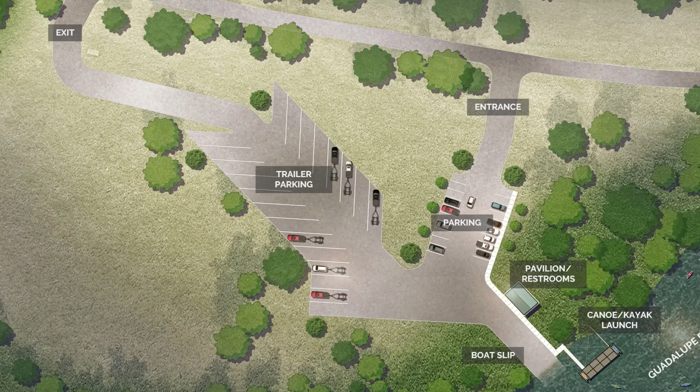We included a schematic for a new boat ramp and a takeout point for kayaks in close proximity to the pump house, based on plans actually provided to us by the Parks and Recreation Department. The plan will also include recommendations for building a consistent theme within the park for fixtures—gateways, pavilions, and a variety of other fixtures—including recladding existing restroom buildings and similar things.

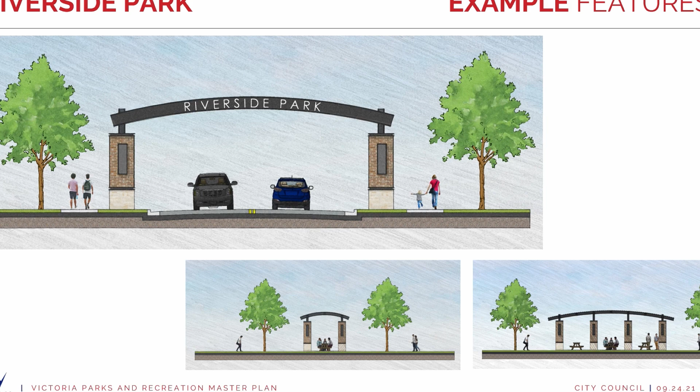So I hustled—sorry if I took too long, folks, but I'm happy to stay around as long as you want to answer questions.

We'll send out the specifics on the conceptual drawings via email so you can review them at your leisure, and we can discuss them at our upcoming meeting. Like the other master plans, this one is also scheduled to come for adoption, so we'll share the full document as soon as it's in final version, hopefully with plenty of time before final adoption.

I like the plans the way they stand now. They're a lot better—yeah, they pop. We were joking internally that this is going to cause some interest in doing the same for all the other neighborhood parks, but we can cross that bridge when we get to it. The idea, though, is understanding what a complete park is and applying those same principles at every park.